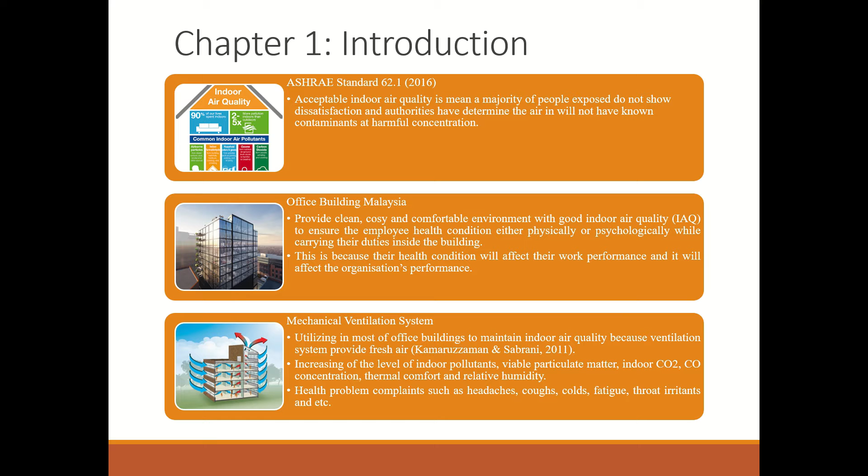The reason I'm doing this research is because the World Health Organization declared the COVID-19 outbreak as a pandemic on 11 March 2020, and we know COVID spreads through the airborne pathway and person-to-person transmission. As workers, we mostly spend 90% of our time indoors, like me, so it's very essential to have good indoor air quality and maintain airflow.

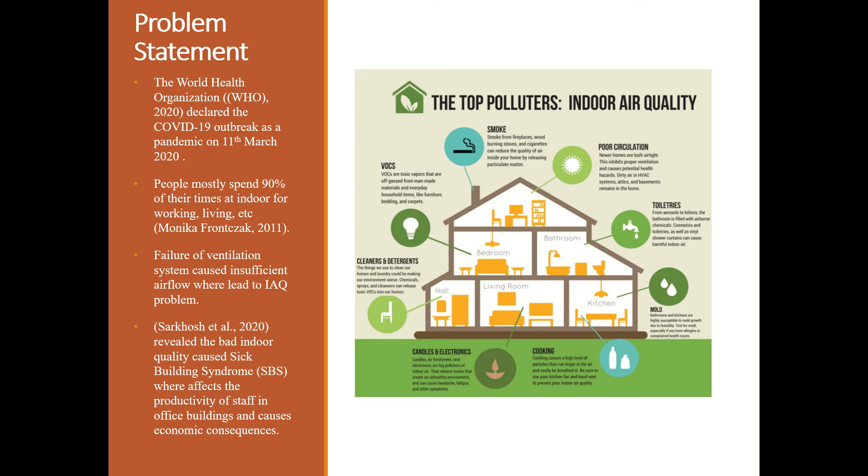The failure of the ventilation system also causes insufficient airflow, which will lead to IAQ problems. The Sarkhosh research revealed that bad indoor air quality causing sick building syndrome will affect the productivity of staff in office buildings and cause economic consequences.

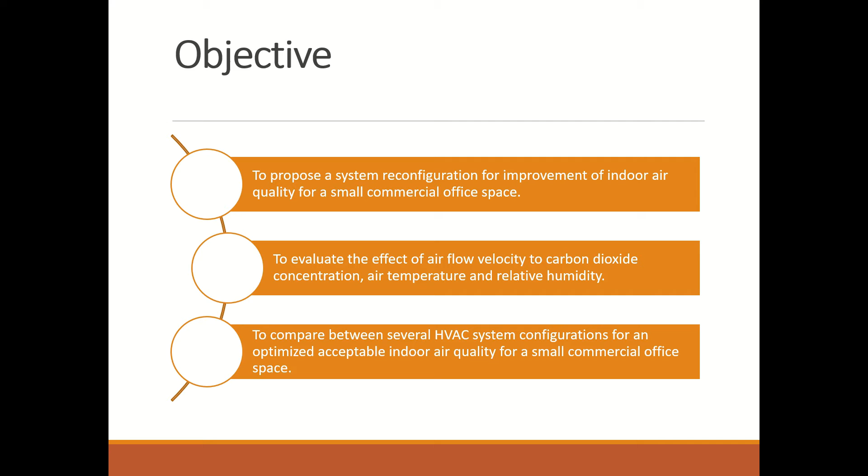So my project objectives are to propose a system reconfiguration for improving indoor air quality for a small commercial office space, to evaluate the effect of airflow velocity on carbon dioxide concentration, air temperature, and relative humidity, and also to compare between several HVAC system configurations for optimized acceptable indoor air quality for a small commercial office space.

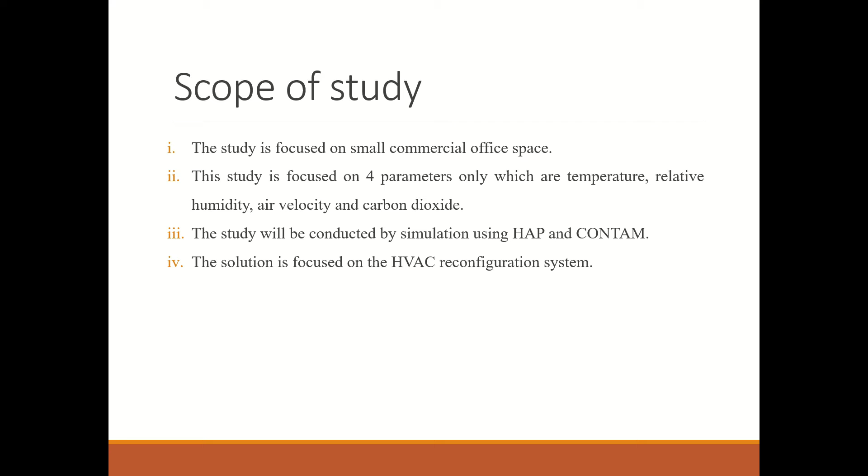The scope of the study is to focus on a small commercial office space and focus on 4 parameters, which are temperature, relative humidity, air velocity, and carbon dioxide. It is conducted using the HAP and CONTAM software and focuses on the HVAC reconfiguration system.

In this project, I read through several studies regarding indoor air quality, so this part covers the literature review.

Indoor air quality, from the United States Environmental Protection Agency, refers to the air quality within and around the building and structure, especially as it relates to the health and comfort of building occupants, and also concerns the temperature, cleanliness, oxygen concentration, moisture content, and movement of air.

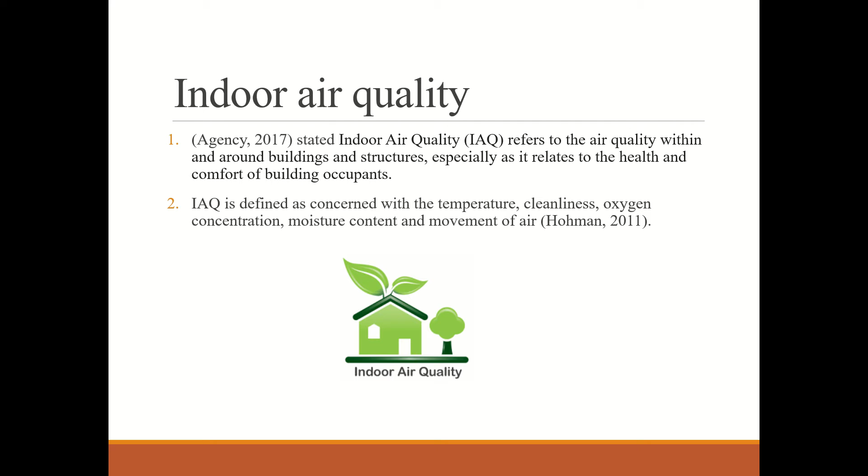There are a lot of parameters of indoor air quality required to determine the status, whether it is good or bad indoor air quality.

Based on the research from Katiyar and Khare, the parameters included in their project are ventilation, level of indoor pollutants, respirable and non-respirable viable particulate matter, indoor CO2, CO concentration, thermal comfort, and relative humidity.

However, Papadopoulos includes temperature, relative humidity, and CO2. Yau, Chew, and Saifullah's research covers dry bulb temperature, air humidity, airflow velocity, and carbon dioxide. Ponsoni and Raddi cover total bacterial count, total fungi count, temperature, relative humidity, and carbon dioxide.

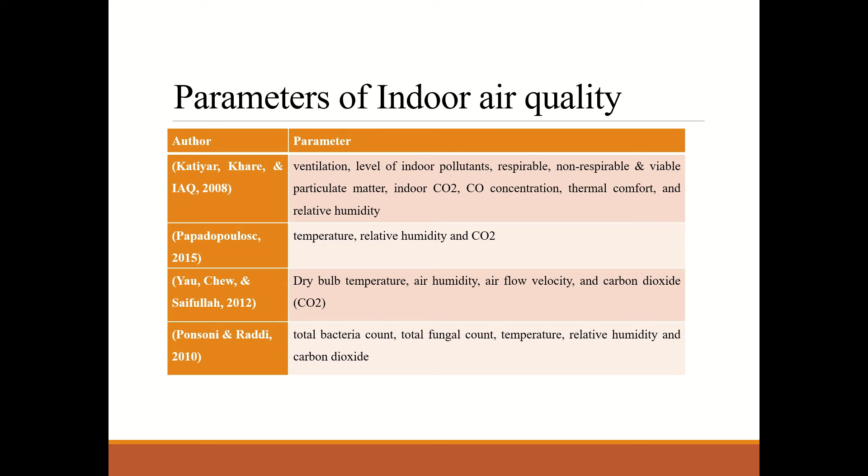Besides that, there are standards for indoor air quality. Based on the research, they have ISO 7730, the International Organization for Standardization, and also ASHRAE Standard 62.1, which refers to ventilation system design and IAQ, and ASHRAE Standard 55, which is thermal comfort environmental condition, and also DOSH, the Department of Occupational Safety and Health.

Referring to ISO 7730, the temperature of the office building should be between 20 and 24, and relative humidity between 30 to 70. For ASHRAE Standard 62.1, the carbon dioxide requirement is 700 to 1000 ppm only.

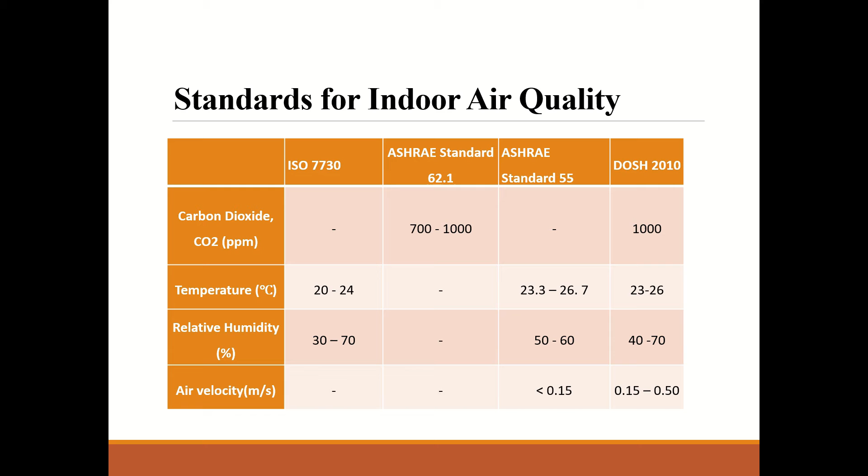The ASHRAE Standard 55 specifies temperature around 23.3 to 26.7, relative humidity around 50 to 60, and air velocity below 0.15. However, from DOSH, carbon dioxide is around 1000 ppm, temperature 23 to 26, relative humidity 40 to 70, and air velocity 0.15 to 0.50.

Bad indoor air quality brings the effect of sick building syndrome and productivity problems.

Sarkhosh performed a study on sick building syndrome in 48 workplaces with bad indoor air quality and found that it affected the efficiency of staff through a series of non-specific symptoms, causing economic consequences.

The general symptoms include headache, sneezing, odor and taste sensation, fatigue, feeling heavy-headed, difficulty concentrating, mucosal symptoms, eye irritation, throat irritation, coughing, and skin symptoms on the face or hands. These are relieved after leaving the building or room.

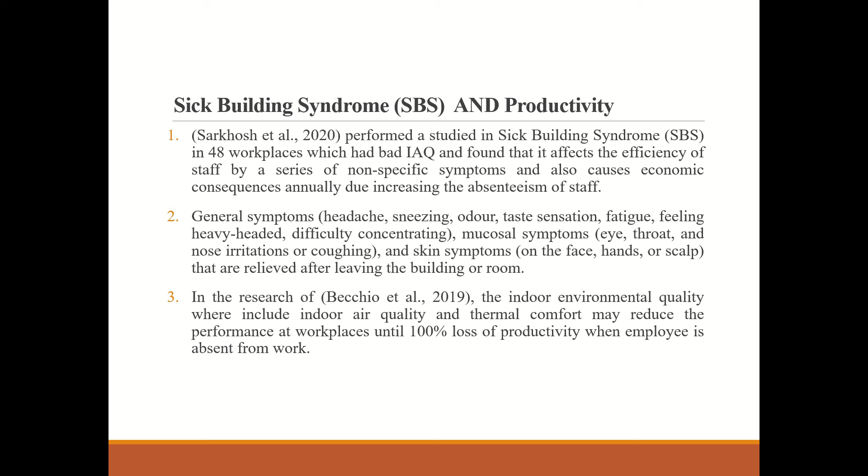In the research of Becchio, it's stated that indoor environment quality, which includes indoor air quality and thermal comfort, may reduce workplace performance, up to 100% loss of productivity when the employee is absent from work.

So how to measure indoor air quality is by survey and physical measurement. Based on research by Priya and Kaja, they used an ASHRAE thermal scale, a 7-point humidity sensation scale, and a 7-point air movement sensation scale to evaluate temperature, relative humidity, and air velocity.

And Abdul Rahman used a 5-point Likert scale to evaluate these parameters in order to measure indoor air quality. Physical measurement uses several tools and instruments to collect the data and evaluate it.

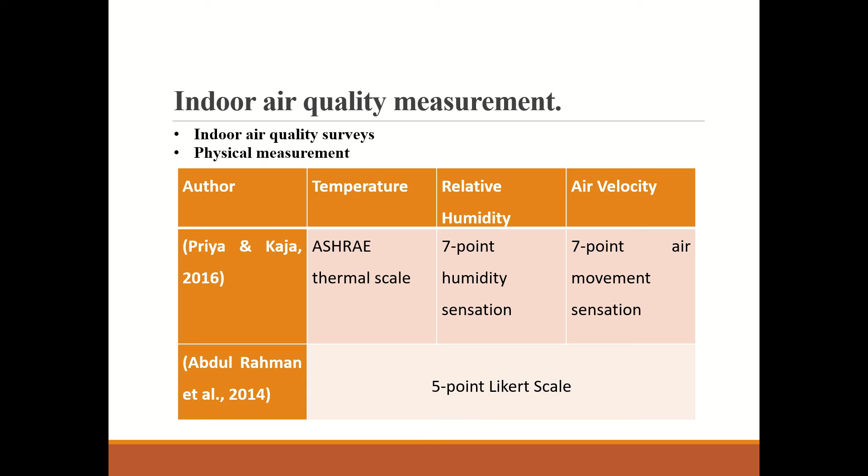In order to improve the indoor air quality for my research, I had to go through some study to see what method should be used.

From Zender's research, he used a decentralized façade ventilation system, which can improve indoor air quality by reducing carbon dioxide concentration through adjusting the supply and exhaust settings.

And Alaidroos and Krarti only applied natural ventilation, which can reduce energy consumption while improving indoor air quality by applying window opening only.

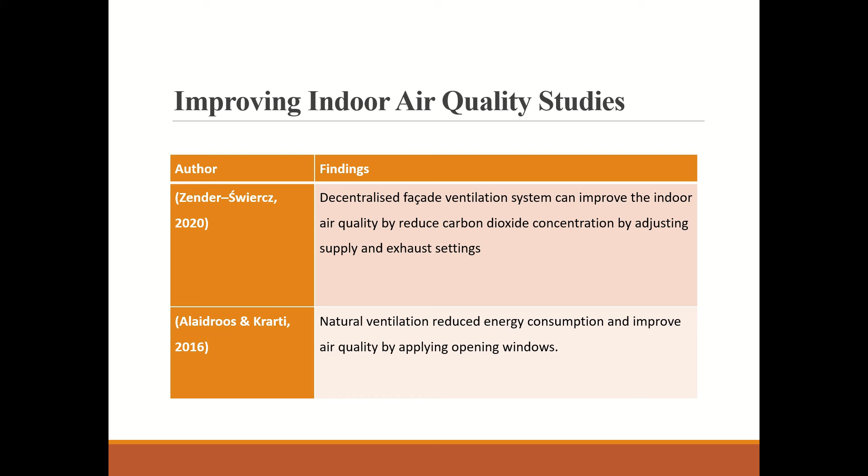In this study, it includes computer modeling and simulation. Based on the research, they have an hourly analysis program which can calculate the design cooling and heating load for space, zone, and coils, and also determine the required airflow rate for space, zone, and system, and also determine the CO2 level.

Another software is CONTAM, which can simulate airflow and pressure, such as room-to-room airflow, as well as contaminant concentration and personal exposure to contaminants.

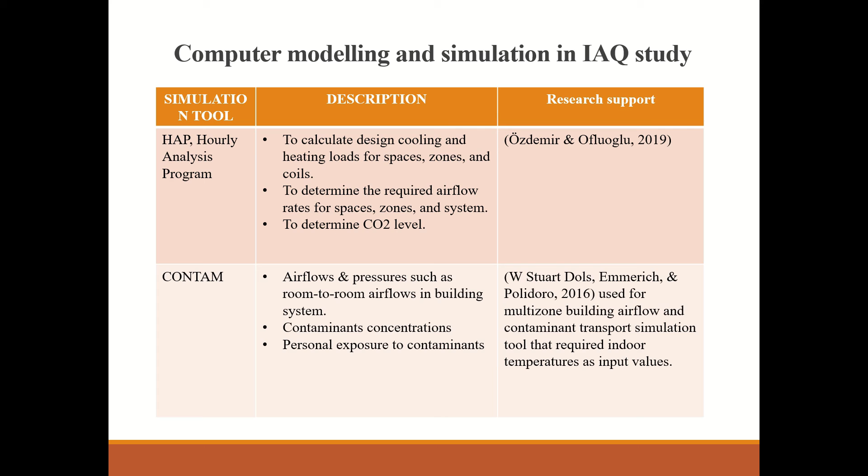This is supported by research as well, from Emmerich, who used it for multi-zone building airflow and contaminant transport simulation. In chapter 3, I'm going to present the methodology.

For process 1, data collection, this is about collecting the data of indoor air quality based on survey and physical measurement. The result was compared to ASHRAE 55 standard and ASHRAE 62.1.

Process 2 is acquisition of building condition, where the design parameters of the physical office were developed using the HAP software with the existing component configuration of the HVAC system. Also, the survey regarding indoor air quality assessment was discussed.

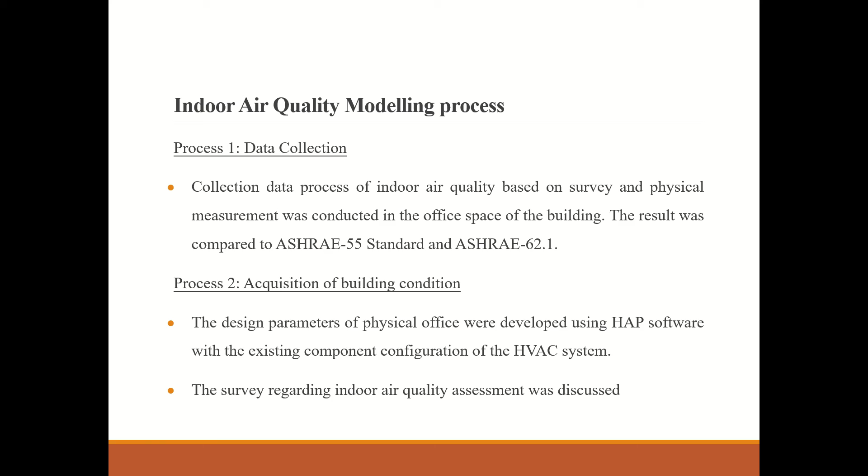Process 3 is the comparison of existing building condition, which means comparing the measured data and the design data to determine the indoor air quality problem.

Process 4 is to propose a HVAC reconfiguration system. The proposed methods were applied similarly in 5 office rooms to improve indoor air quality, and the proposed methods are natural ventilation and decentralized ventilation.

Natural ventilation was simulated using constant airflow with an open window, and decentralized ventilation was simulated using a constant supply fan with different exhaust airflow.

Both simulations are used to simulate the indoor air quality parameters in an occupied small commercial building, which are operative temperature, relative humidity, airflow velocity, and carbon dioxide.

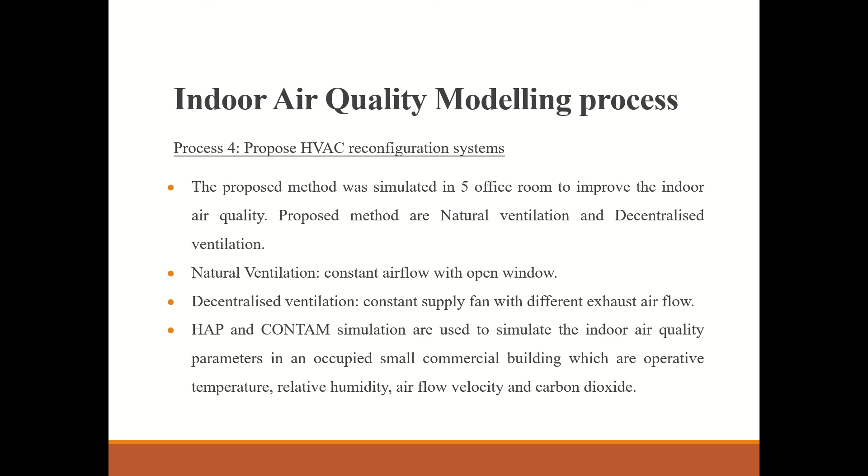For process 5, result analysis, the comparison between the two HVAC system configurations in each room was discussed to optimize acceptable indoor air quality, and to analyze the effect of airflow on carbon dioxide concentration, air temperature, and relative humidity.

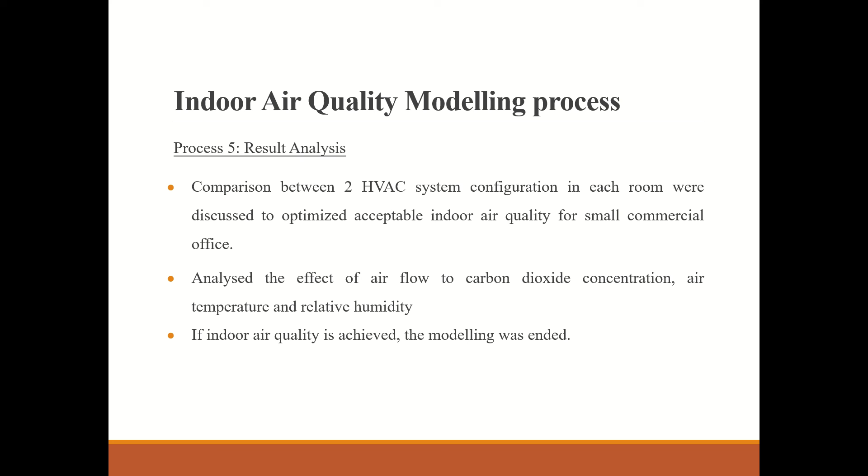And if the indoor air quality is achieved, the modeling was ended.

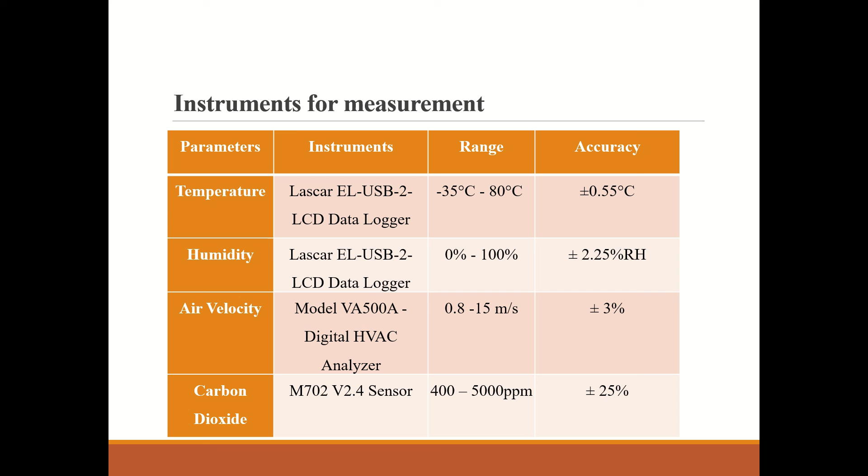The instruments for measurement included the Lascar data logger used to measure temperature and humidity, a digital HVAC analyzer used to measure air velocity, and the M702 sensor used to measure carbon dioxide.

This is my flowchart of my study. It will start from data collection, after that acquisition, then comparison of existing building, then propose HVAC system reconfiguration, then we'll do the result analysis, and last we'll achieve the indoor air quality.

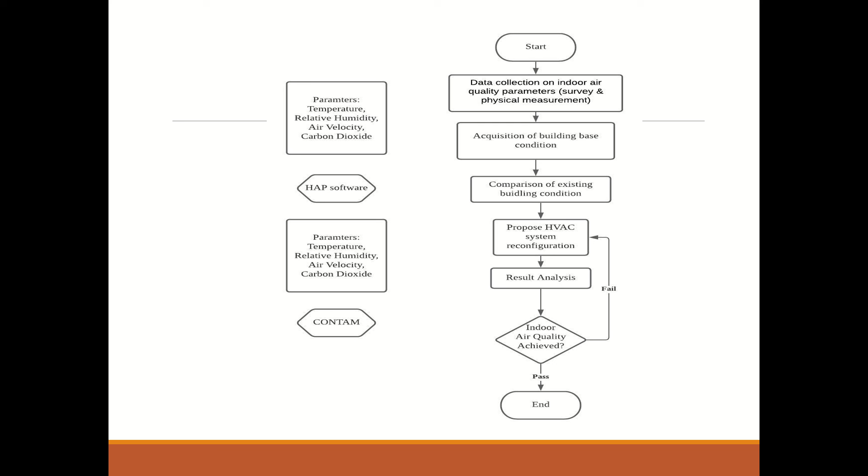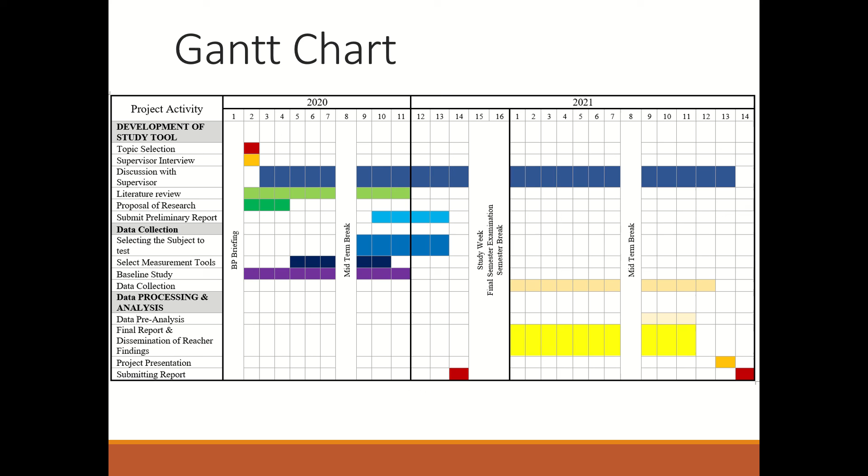I'm going to continue my research next semester, continuing data collection and analysis, and simulate the two different methods to improve the indoor air quality.